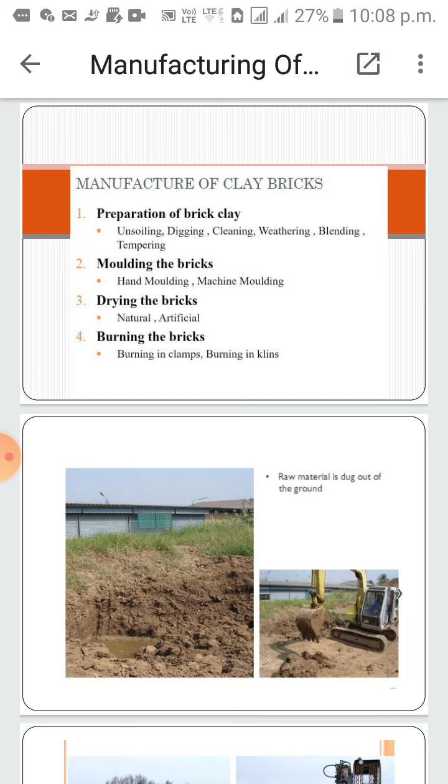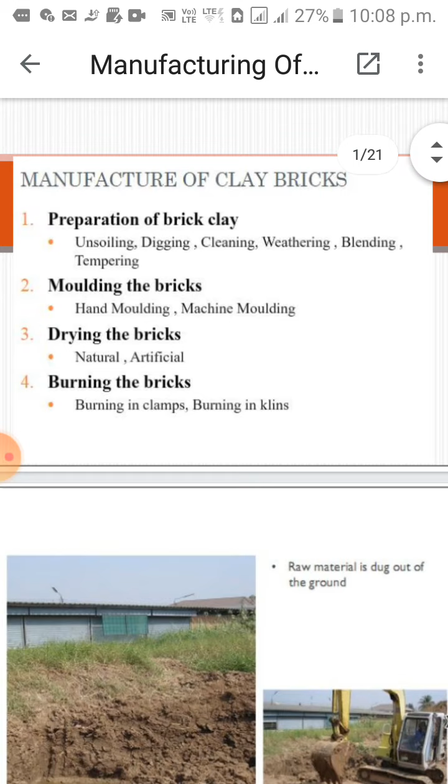So today we are going to see the manufacture of clay bricks. So in clay brick there are 4 steps. First one, preparation of brick clay. Second one, molding the bricks. Third one, drying the bricks. And the last one, burning the bricks.

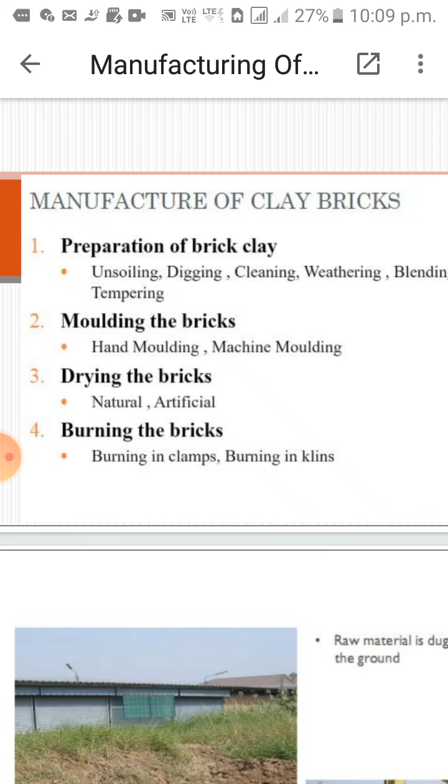So you have all seen the manufacturing plants for bricks in your area. So we all know, first we have to collect the soil or the brick clay. Then we have to prepare it. Then we'll have the mold for getting the shape of the brick. And then we have to dry the brick. And then we have to burn the brick in a kiln.

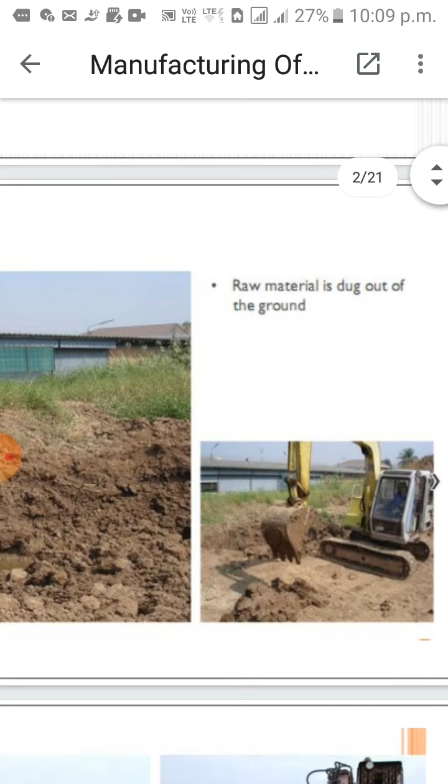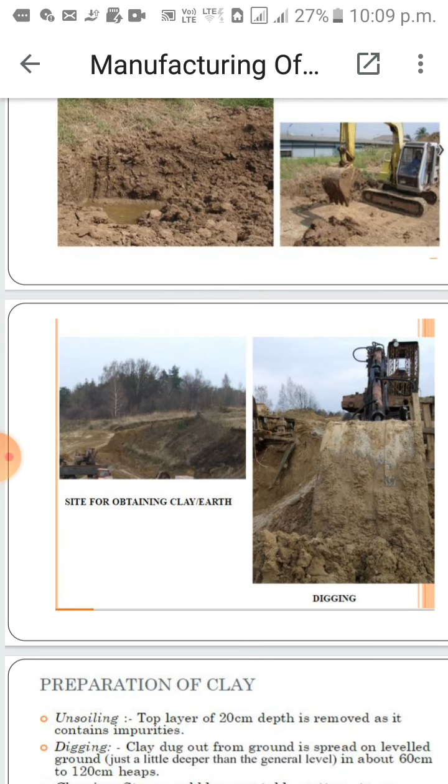So see here, raw materials are dug from the ground. See, you have the machine for digging. And then you obtain the clay earth. Clay earth is earth suitable for making bricks. Okay, now once you got the clay, these are the processes to be followed. First one, unsoiling. So the top layer of 20 cm depth is removed because it may contain impurities.

After that, digging. You have to dig the clay and then it is spread on level ground. And then if there are any stones, pebbles, vegetable matter, etc., they are removed. And all the lumps, the katti, are converted into powder form. Then weathering. The clay is exposed to the atmosphere for a few weeks, then it will be mixed with water. And then blending. Blending is, you can add any ingredient and mix it.

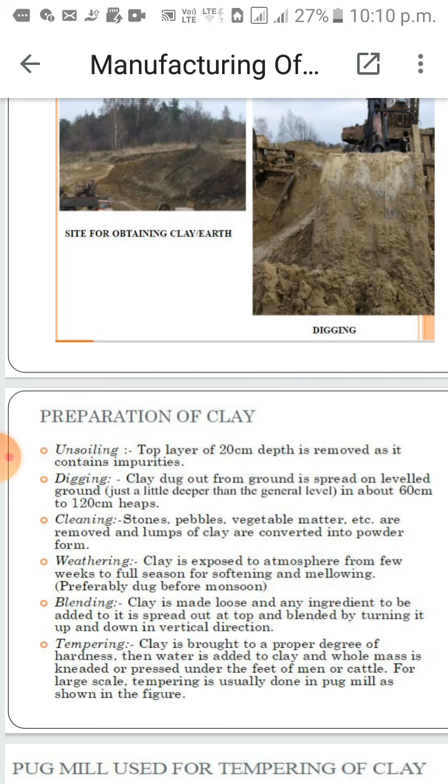Okay. And then tempering. Now clay is brought to the proper degree of hardness, water is added to it, and then it is pressed. Kneaded or pressed. Kneading is pressing under the feet of men or cattle. And for large scale, tempering is done in a pug mill. Okay, this is a pug mill. See the pug mill.

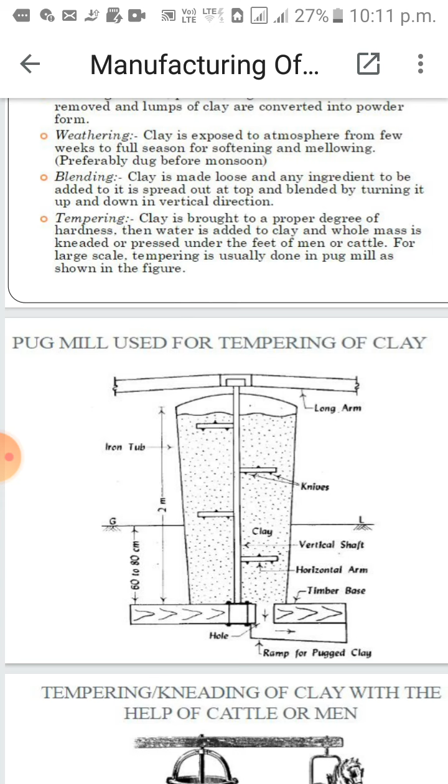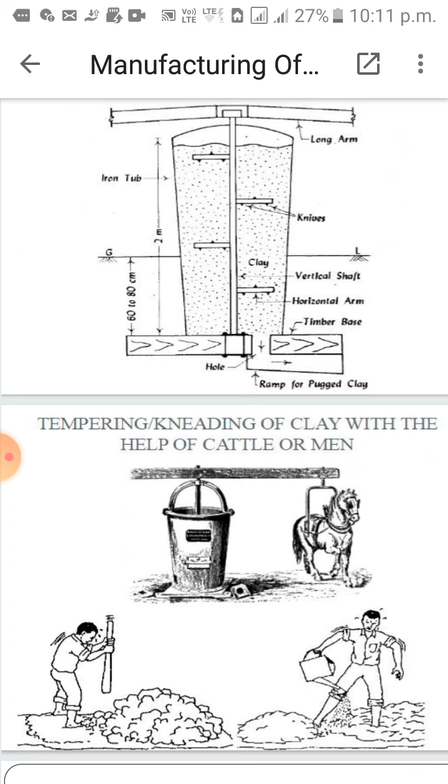You add clay at the top, and there is a vertical shaft. So this shaft along with the horizontal arms kneads the clay. It is like a mixie. And then the pugged clay will come from the hole at the bottom. So this is very simple. This is a pug mill. And this can also be done with the help of cattle, see the picture, or with the help of men. Okay. So this is the process of tempering which I told you.

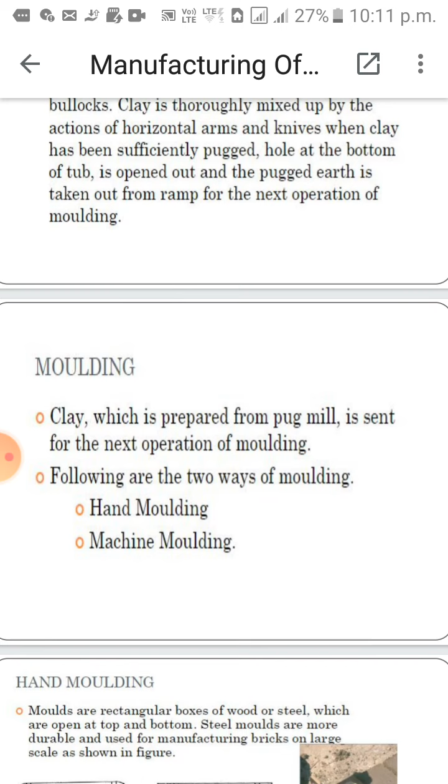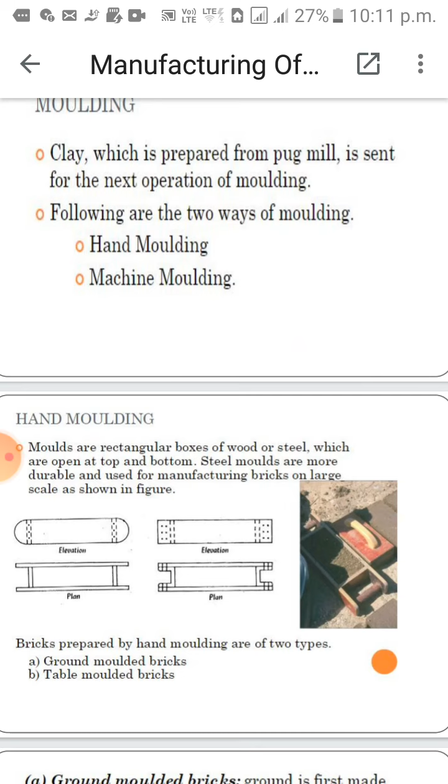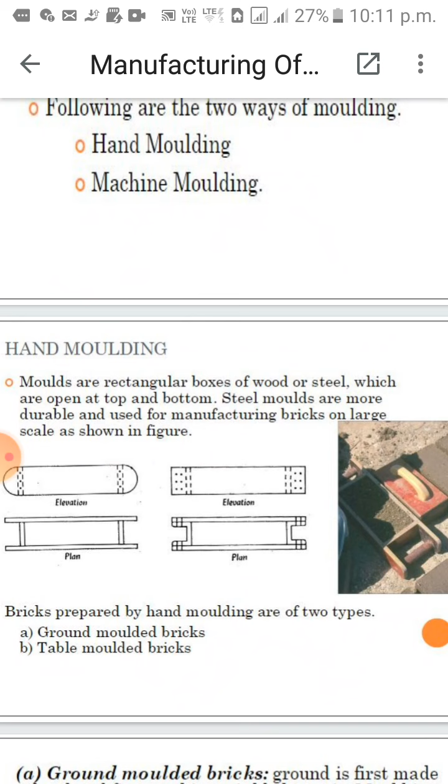Then molding. So now the clay which comes out of the pug mill is sent for the next operation of molding. There are 2 ways of molding: hand molding and machine molding. So in hand molding, you have molds, a rectangular box of wood or steel. It is shown in the picture. It is also drawn. It is open at the top and the bottom. Usually steel molds are more durable, so they are used.

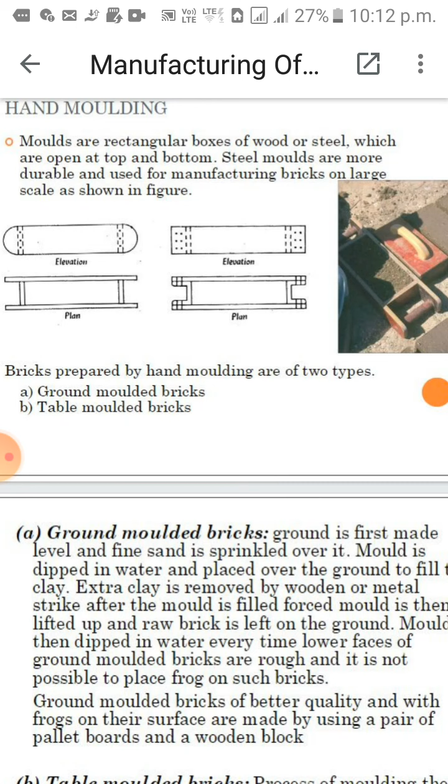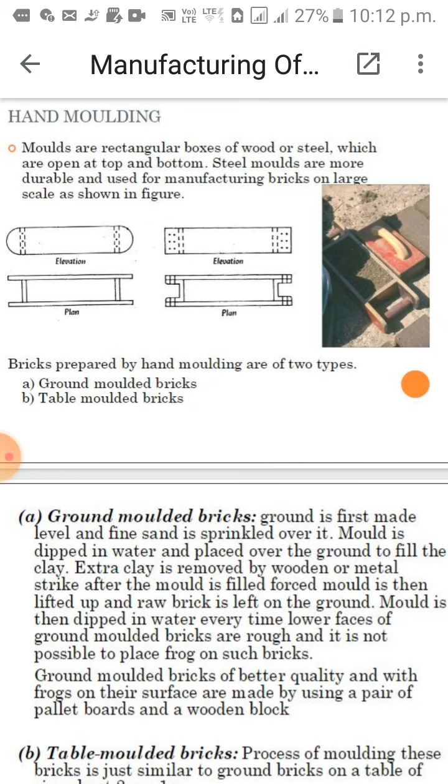Bricks prepared by hand molding are of 2 types: ground molded bricks and table molded. Ground molded, as the name indicates, means on the ground. You sprinkle sand over the ground, then you dip the mold in water and place it over the ground. Then you fill the pugged clay, remove the extra clay, that's all. And table molding, the same is done on a table. The size of the table is 2 meter by 1 meter. So these are the different molds. See here, this is the ground molding process shown here.

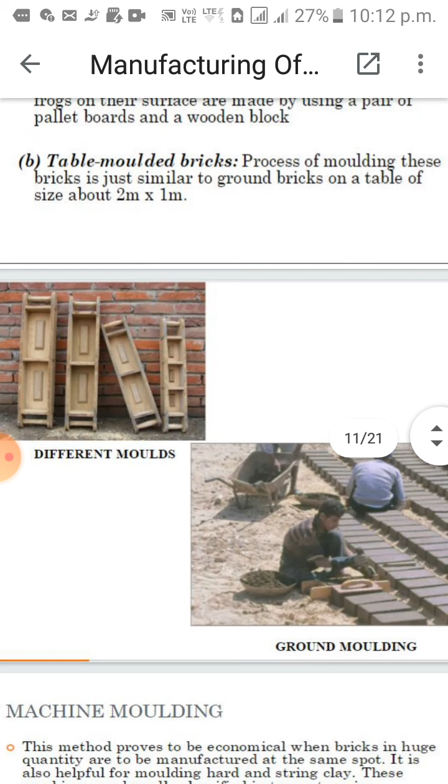Then machine molding. Machine molding is more economical when bricks have to be manufactured at the same spot. It is also used for molding hard and strong clay. The machines are broadly classified into two categories: plastic clay machines and dry clay machines. A plastic clay machine contains a rectangular opening. You place pugged clay in the machine and it comes through the opening. Then it is cut into strips by wires fixed in frames. It is cut by using wire, so they are known as wire cut bricks.

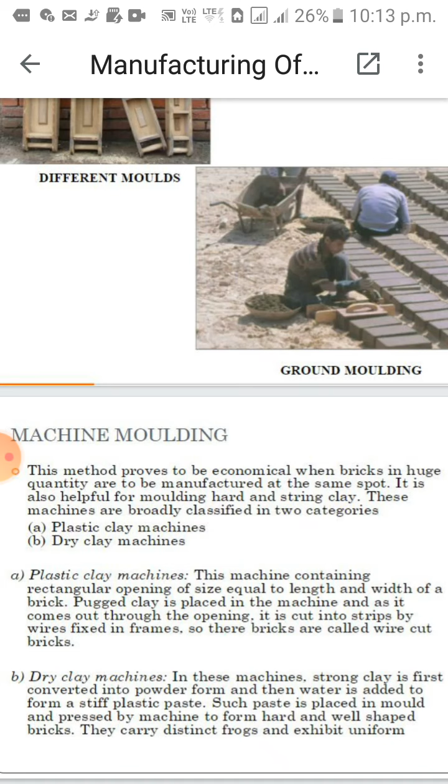Then you have dry clay machines. Here the strong clay is first dried, then converted into powder form, and then water is added to form a stiff plastic paste. Then this paste is placed in the mold and pressed by the machine to form hard and well-shaped bricks. Okay, now the next step after molding.